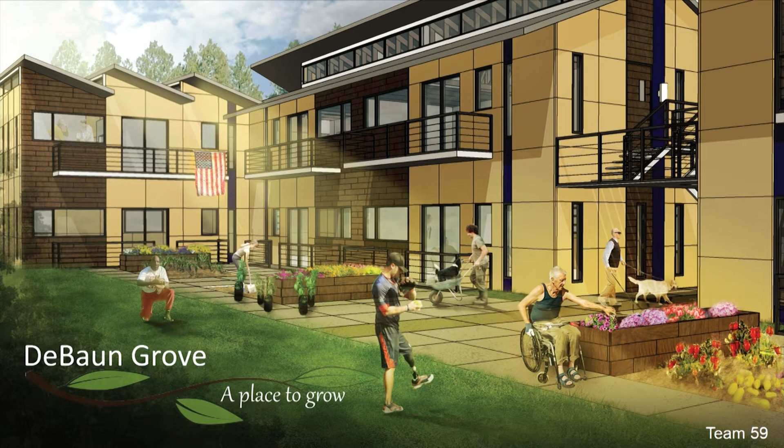In the late 18th century, Petrus DeBaun, better known as Peter DeBaun, erected a one-room Dutch colonial house in what is now today 324 Main Street, Emerson, New Jersey, a bedroom community, a suburb of Manhattan, New York, where the average median household value is $426,000. Over the next 2.5 centuries, through luck and good stewardship, the DeBaun house grew and his legacy remained intact.

Our team saw the challenge of the 1.5-acre site and the location in Emerson, New Jersey as an opportunity to create not only an affordable housing development for disabled and homeless veterans, but to create a community that is sustainable fiscally, environmentally, civically, and socially. Throughout our presentation, in the lower left-hand corner, you will notice an icon which symbolizes which of the 4 previously mentioned dimensions of sustainability we are referring to. Red symbolizes fiscal, blue, civic, orange, social, and green, environmental.

So please sit back and relax as we walk you through DeBaun Grove, a place to grow.

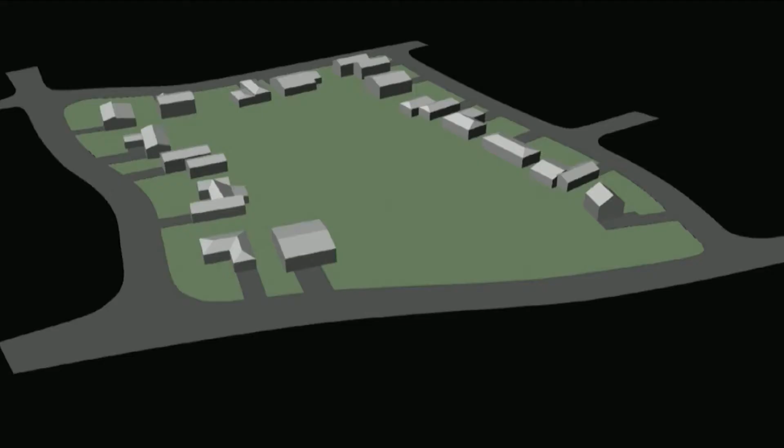We seek to create a site that pays homage to the rich legacy of Petrus DeBaun, better known as Peter DeBaun, by creating a theme that reflects the manifestation, the resiliency, and the progression of time. We seek to do this by adding a 21st century addition to the Peter DeBaun house, which will serve as a gym and physical therapy training center.

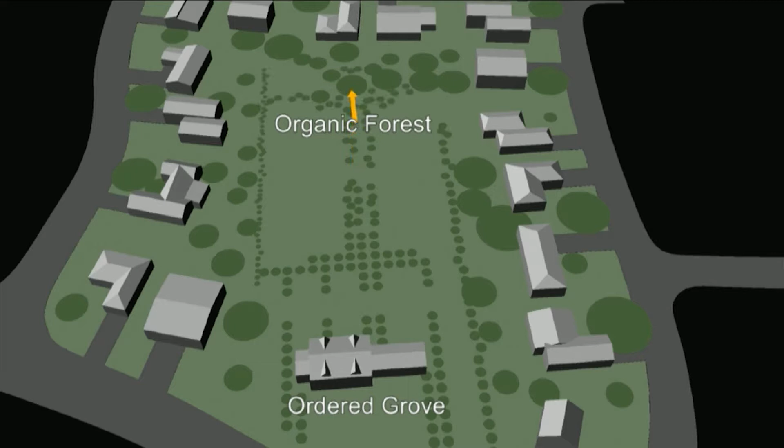The landscaping will move from a more manicured to a more natural organic forest. Permeable pavers will be placed throughout the site to assist with on-site stormwater management. 4 buildings of 6 units each at 650 square feet will be erected.

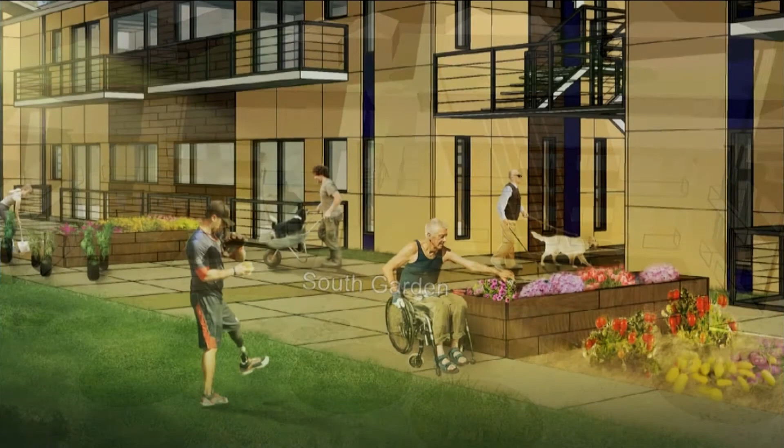We wanted to continue on playing with the progression of time by creating an area that caters to the daytime view and the nighttime view. Our daytime view is created through the creation of the South Garden area.

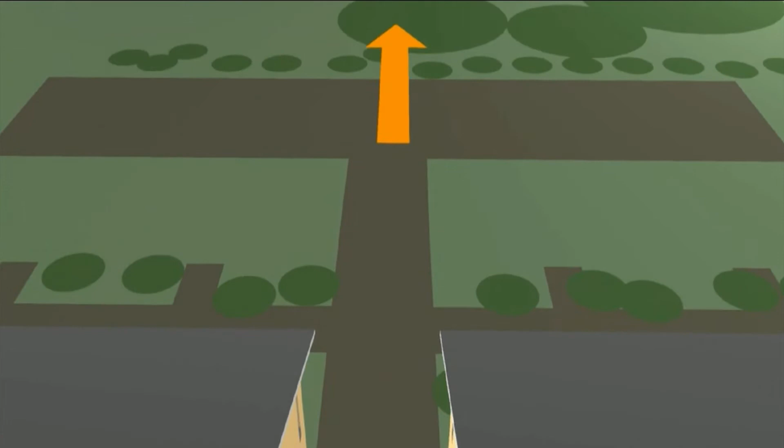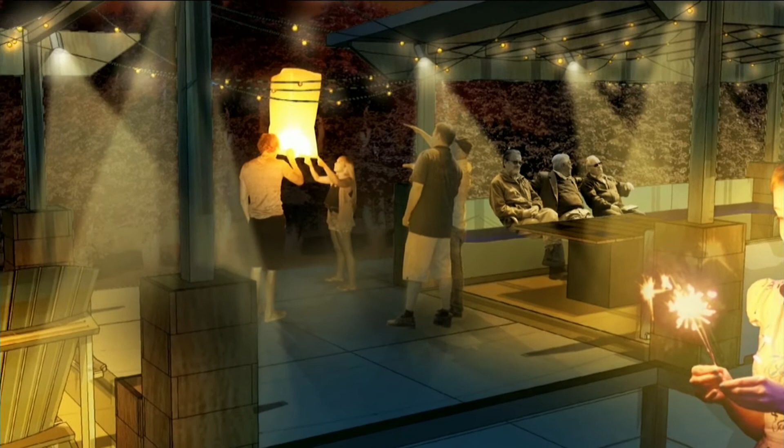As you walk through the circulation core to the north patio, you'll notice an area that seeks to capture the nighttime moonlight, bringing residents, family, friends, and visitors together for barbecues, getting together and relaxing, outside chess games, 4th of July celebrations—whatever you can imagine will occur in the north patio area.

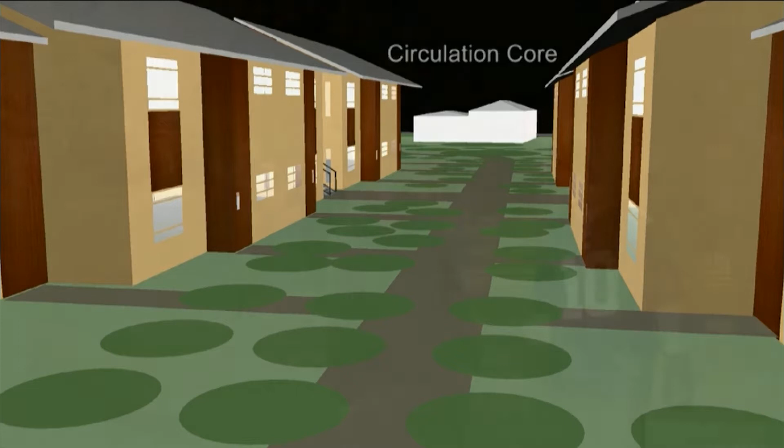With our backs faced towards the Peter DeBaun house, heading westward through the circulation core, throughout our site, you'll notice where residents and visitors will be able to navigate to and from their units.

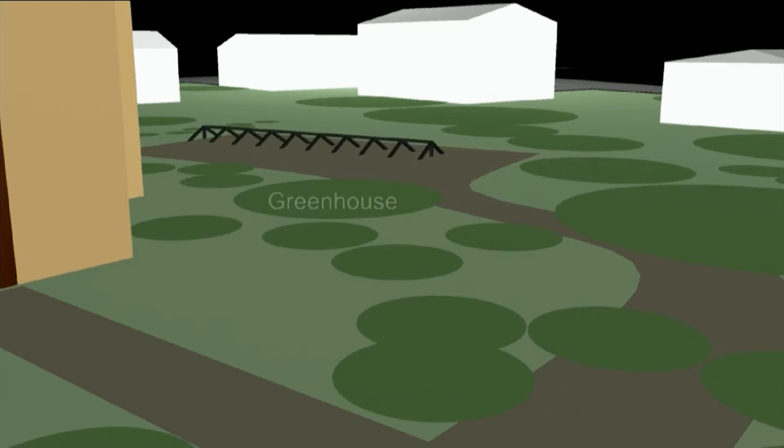As you continue to walk westward throughout our site, to the back of the property line on the left-hand side, you'll notice a greenhouse that will allow residents to have therapeutic relief while exercising their green thumb. DeBaun Grove will be a place to grow.

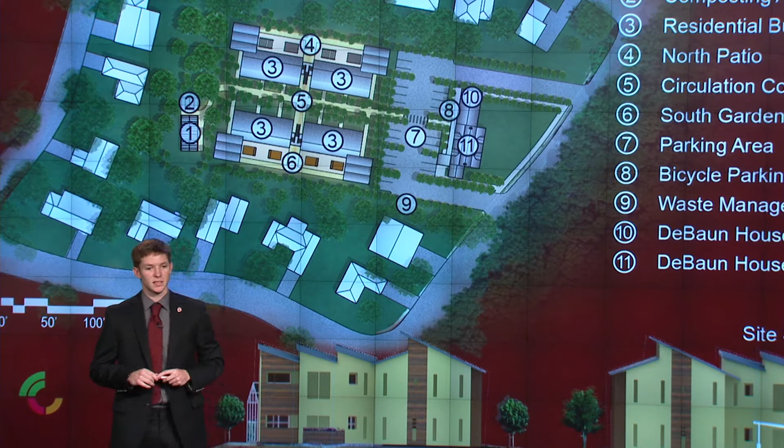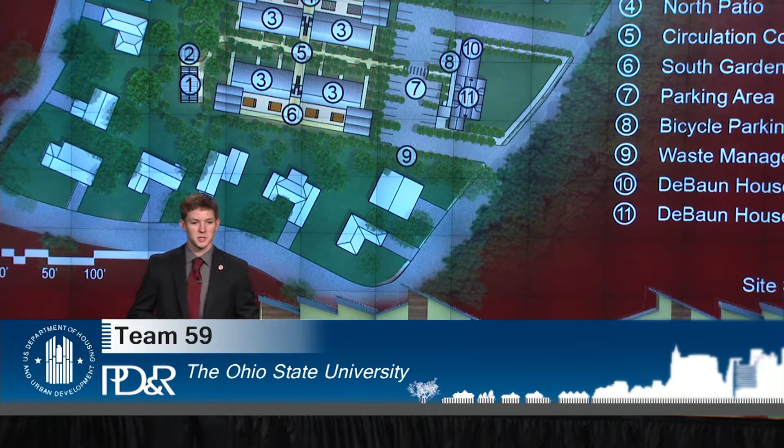If we move down to our site section here, we're proposing a stormwater management strategy that by grading the site will funnel the stormwater towards our garden and grove areas, and it will keep stormwater on our site and off of the existing surroundings. We are also proposing utilizing permeable pavers to help return our site to a more natural condition.

The total development cost for DeBaun Grove will be approximately $5.7 million, which includes the renovation to the current existing structure of the DeBaun House, the addition, and the residential units. The approximate per unit cost for the residential unit solely is approximately $213,000. The greenhouse will be a donation courtesy of Home Depot.

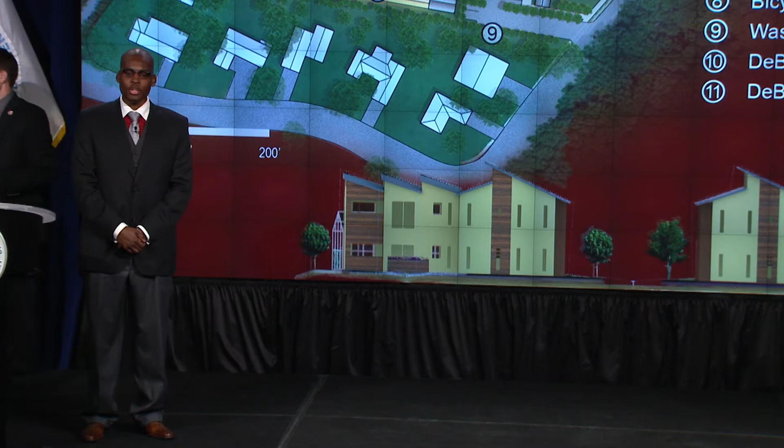In order to serve the most vulnerable of the veteran homeless population, DeBaun Grove will be home to VA-eligible veterans who fall under the HUD chronic definition of homelessness. We propose that the development be a Veteran Affairs Sustainable Housing Development Project. This will allow us to maximize existing resources within the VA and to provide supportive services directly on site. In addition, DeBaun Grove will once again be the home to American Legion Post 269.

Our veterans within the New York, New Jersey area that are homeless will be able to receive stable housing as well as direct services on site because we are a VASH project. This will allow us to serve 24 of the most vulnerable veteran populations, the over 500 self-reported veterans in the New York, New Jersey area. As my colleagues have mentioned multiple times, we want DeBaun Grove to be the place where our nation's heroes can continue to grow.

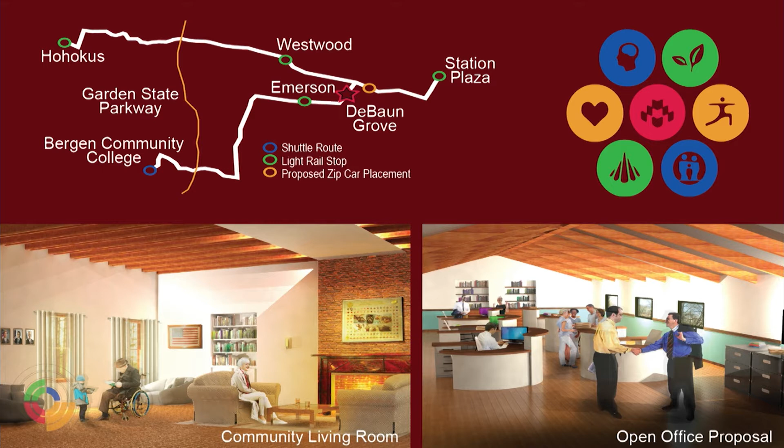The existing DeBaun House is of the Dutch colonial style, mainly defined by its roof line. So in our renovations, we wanted to expose the wooden roof beams on both the first floor community living room area and the second floor open office proposal. Another restoration effect we wanted was to restore the existing fireplace. We also wanted to open up the views westward of the Emerson Woods complex to let more light and air into the space and provide better exterior views.

The development cost for the restoration of the DeBaun House and the addition will ring in at approximately $560,000, reflective of $100.46 per square foot for the restoration of the current existing structure and $147.78 per square foot for the addition.

The DeBaun House is going to be the hub of our site. All staffing, services, and community recreation will be headquartered within the DeBaun House. So we propose, when you walk in through the downstairs area, we have the community living room. This area will be able to be partially closed off to hold private meetings, such as Monday night NA meetings, Tuesday AA meetings, Wednesday night rotational recreation or group therapy sessions.

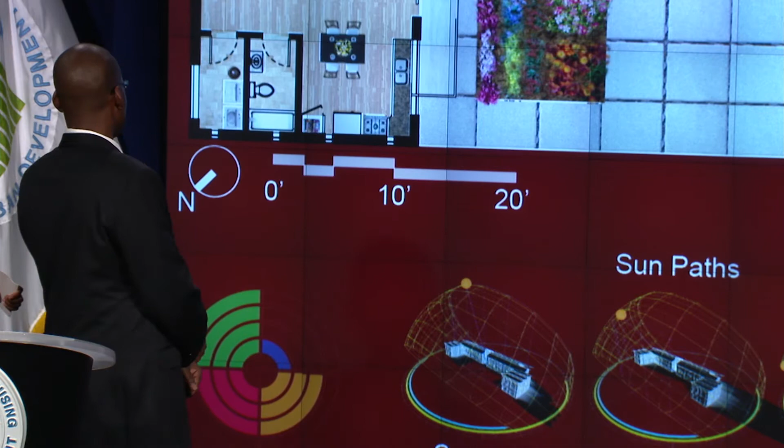Through our research, we realized that most affordable housing projects are not feasible because they carry debt into their operating years, but it is possible to develop an affordable housing project with little to no debt, rare but possible, and we believe this is feasible considering the size and the location.

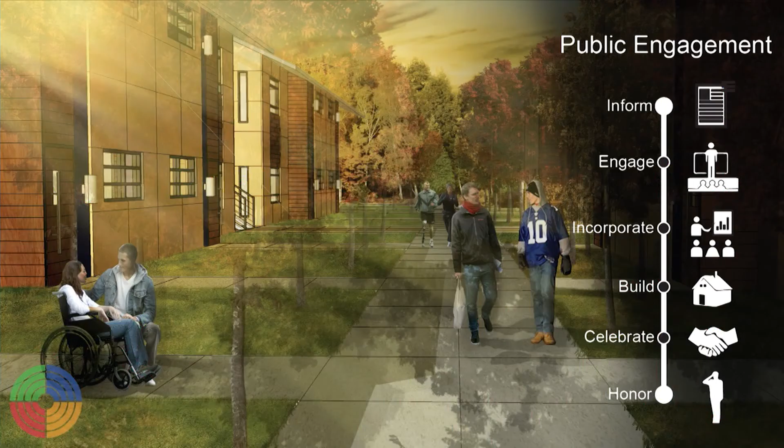Outside of finances and site planning, something we thought would be an issue is building an affordable housing project in Emerson, New Jersey. We anticipate pushback in the form of not-in-my-backyard sentiment.

So we wanted to be proactive and created a public engagement strategy focused on six steps: inform, engage, incorporate, build, celebrate, and honor.

To inform, we will meet with the Congress member of the area, the two state assembly members, the state senator, the planning commission, and the county executive to address any concerns they may have, lay out any issues, solicit feedback, and give them the carte blanche that most elected officials demand and deserve.

Now I'm going to turn it over to Chanel and Brad to finish it up.

Next, we have engage. We're going to engage the community by holding town hall meetings. The schedule will be posted online on our website as well as in public areas. We'll engage them during these meetings to solicit feedback, solicit support for our site, and for them to ask us questions about what we are doing with this site.

Most importantly, we want to debunk myths about affordable housing, because we want people to understand that affordable housing does not increase crime in your area. It doesn't devalue your property. It's a way for working class people to own their own homes and have sustainable, stable housing.

After engage, we plan to incorporate the public in our design process. We'll have design charrettes where we engage the public and different public officials to get their regional input and input from the surrounding community.

I'll start with the last question. The little room is a laundry facility for the residents. As far as the light well, it's actually split in half, so half of it will come down to the lower unit, and half will go to the upper unit. We thought this might add slightly to the construction cost, but it would also make the units more airy and provide more light and a better quality of life for the residents.

And Chanel, I have a question for you about your attitude around how to best engage people in some of these residential social service activities. Thinking about these open offices upstairs, I'm curious about their location being on the second floor. Do you find that to be a benefit or a drawback? And then there's the idea of privacy and doing really good nitty-gritty engagement with your residents.

So upstairs, the open office plan, we see it as a plus. It acts as a way for all of our staff members to constantly engage with each other, so there are no silos — the social workers aren't just going to work by themselves separate from each other, and the project manager won't, and the property manager won't. They'll all work together. The drawback is that it's upstairs, so it's not ADA, and our residents, if they have a physical disability, can't make it up to those offices.

But to compensate for that, we do have private meeting areas downstairs in the DeBaun house that are closed, private meeting areas where the social workers can meet one-on-one. They can also be used as a group meeting area on the first floor of the DeBaun. And you asked about engaging and doing the hard, nitty-gritty work.

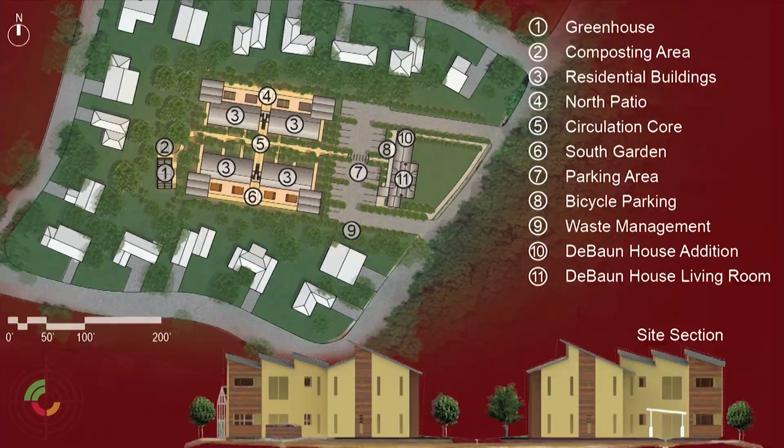We tried to separate it more by usage, not by which side it's on. The south side, taking cues from the site, is more used for daytime—there are gardening areas, so it's a relaxing, calm place. The north side is for meeting for different events or more nighttime, active uses like barbecues or football tailgates. We separated it more by usage.

Also, due to the angle of the sun on the south side, we wanted to ensure plants would grow there. We were going to make the areas duplicative of each other, but figured plants might not survive on the north side, so instead we created a space for nighttime use that's more relaxing. It moves from a more semi-private area, as mentioned earlier, to the balcony space, and into the completely private realm of the units themselves.

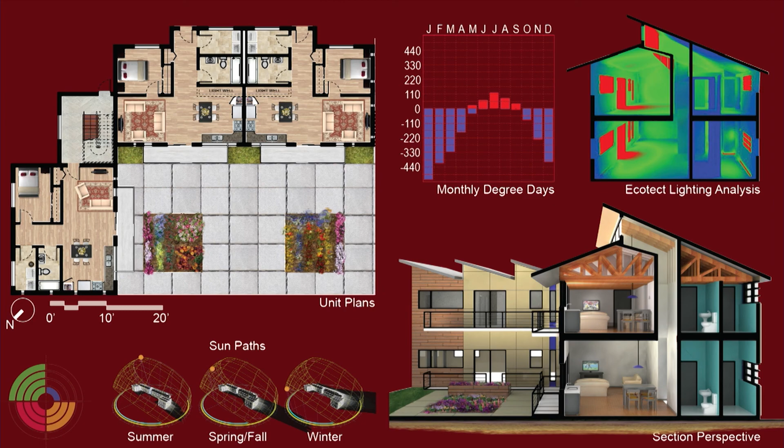Thanks. Do you have another question? Okay, we have 45 seconds.

I want a couple words around innovation—quickly, what are you most excited about, all three of you? Rapid fire: the services. The overall integration of sustainability in every sense of the word. The use of different ways of light wells and different lighting aspects.

Great, thank you so much. Appreciate it. Thank you. Thank you.